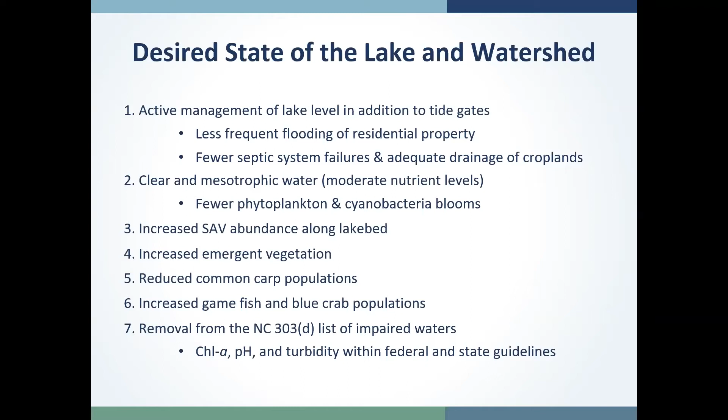Working towards increasing the SAV abundance along the lake bed and emergent vegetation, reducing common carp populations, as you'll hear from the technical working group later today, increasing game fish and blue crab populations, and again, the ultimate removal of the listing on the state's 303(d) list by getting the chlorophyll A, pH, and turbidity parameters within federal and state guidelines.

To attend to those desired actions, we identified a few priorities, including creating a formal body that provides management authority for active water management within the watershed in close coordination with the refuge, which would be excluded as a formal body since the Fish and Wildlife Service cannot cede management authority.

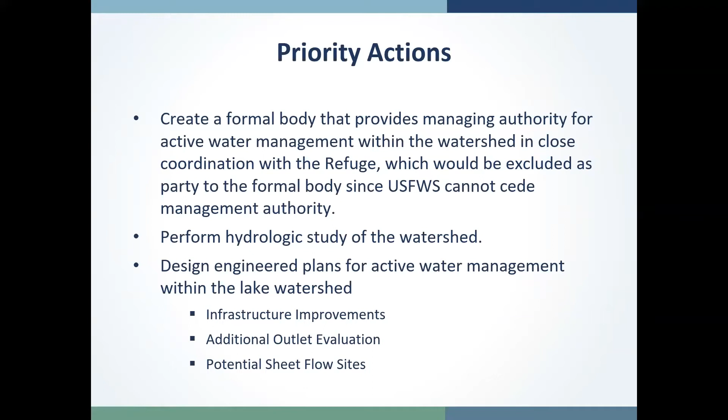We performed a hydrologic study of the watershed, which has been completed to date, and designed engineered plans for active water management within the lake watershed by evaluating where infrastructure improvements might be beneficial, additional outlets, and the use of potential sheet flow sites, which you'll hear more about tonight.

As we've gone from development of the watershed restoration plan to implementation, seeking funding to implement those priority management actions has been the priority, from 2019 to 2020. Funding was awarded from the Clean Water Management Trust Fund, the State's General Assembly, and the National Science Foundation. That funding was used to implement these priority management actions over the past 18 months.

We hired Geosyntec Consultants and Coastal Protection Engineering as the engineering firm to develop the hydrologic study and also develop some engineered designs that you'll see tonight.

This has been done in cooperation with a robust stakeholder team that includes representatives from the county, U.S. Fish and Wildlife Service, Wildlife Resource Commission, and many residents of the community within the watershed we're working in.

Additionally, a memorandum of understanding had been signed between Wildlife Resource Commission, Hyde County, and U.S. Fish and Wildlife Service to continue to see this effort through, even after the initial development of the watershed restoration plan.

For those who would like to review the plan, you can visit the project website at nccoast.org/Lake Mattamuskeet. The plan and additional resources from past meetings are available for your review, and you can also subscribe for updates about future meetings and submit comments after viewing the presentation tonight.

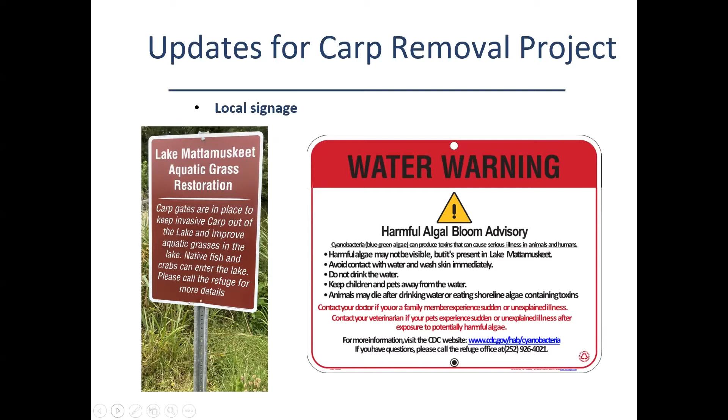The other sign that you'll likely see around the lake is the water warning sign that we installed a couple years ago. This is a public advisory letting people know we have harmful algal blooms that do produce toxins in the lake. Next slide, please.

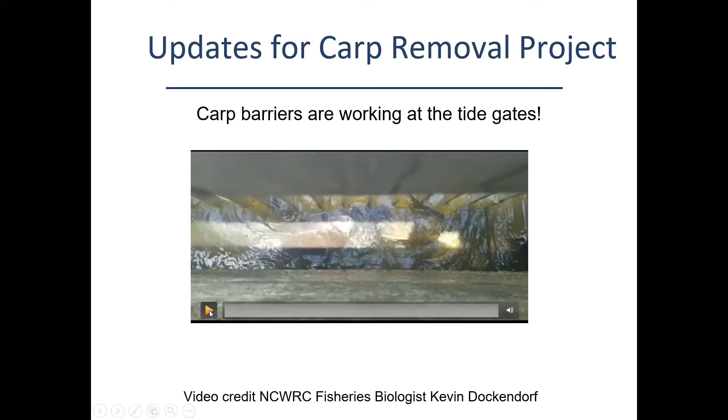The carp barriers are working at the tide gates, and this is some footage. This particular footage is from Wildlife Resource Commission fisheries biologist Kevin Dockendorf. Can you play this for us, Michael? This is beauty to our eyes. These are carp that cannot get through that 2-inch spacing on those carp barriers.

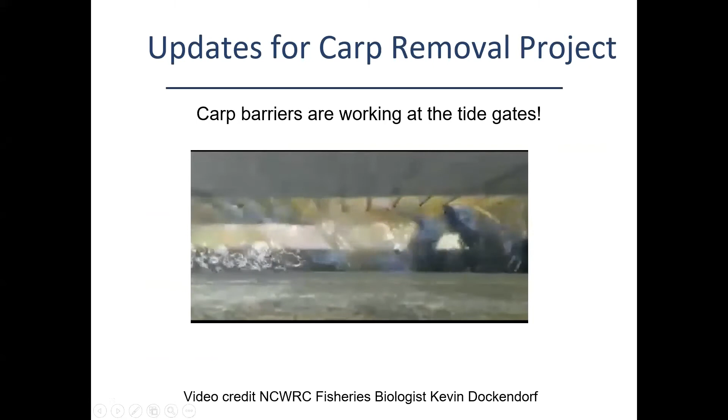Next slide, please. I have one more footage I need to share. This is from Wildlife Resource Commission Officer Robert Wayne. Michael, could you play this for us? This just shows all the carp in that bay at the tide gate. It cannot pass through those carp barriers. It's very, very exciting. Next slide, please.

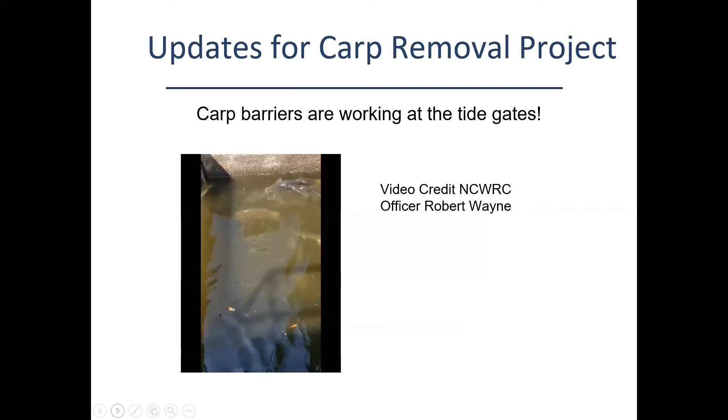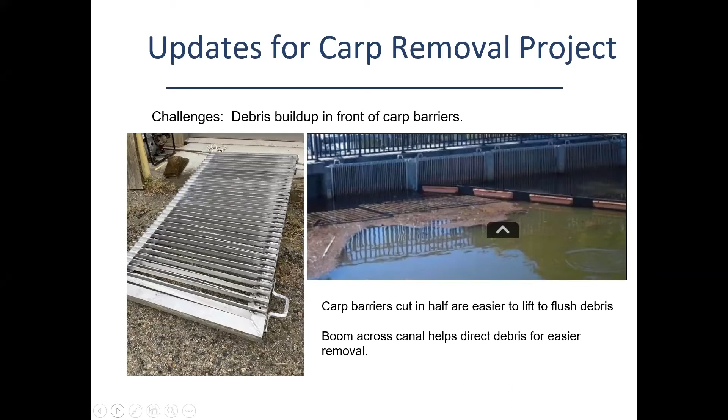This year, I'm really excited. We have 2 new East Carolina University capstone student projects. They started in August. These are the senior engineering students. For the first team, it's a Carp Deterrent team, and they are actually going to be working on a portable deterrent type device that we can place in that particular bay with that half-cut carp barrier to scatter the carp.

Dr. Raymond Smith from ECU sent us the idea, and then Katie Potaka, one of our fisheries biologists with Wildlife Resource Commission, she's actually had experience with this. We're really excited with some of the ideas that this particular team is already coming up with. In addition, this team is going to design some deterrent devices that we can place around the culverts that go through Highway 94. This will separate the east and the west basin and will be helpful when we do the maximum removal.

Some of these deterrent devices will also be placed in some of our secondary canals to prevent adult carp from going up into these side canals in search of additional spawning habitat. So this deterrent team's designs are going to be very important as we move forward.

Just as important is our biosecurity barrier team. This group of students is going to design the secondary barrier for the outfall canals. This barrier, the primary and the secondary, has to address what happens during storm surge, when we have water going over the tide gate that brings carp into the lake. So they're also going to look at some type of secondary barrier placed in the canal in case the primary barrier is damaged.

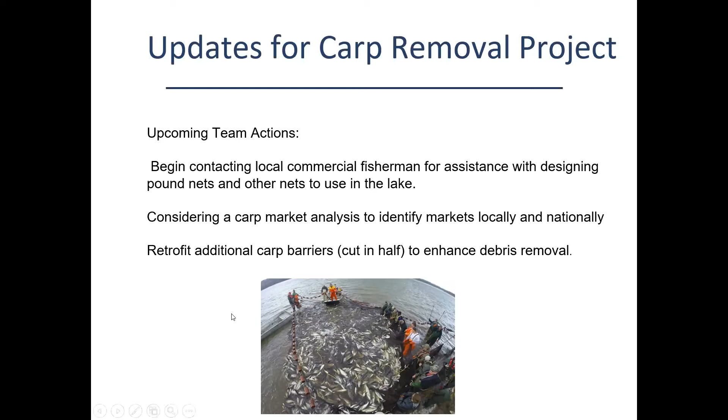If there's any questions, I might have a minute or two to address them. I want to sincerely thank all of our partners and collaborators, and I want to thank the members of the technical working group, because their moral support and their expertise, they're just an amazing group of professionals to work with. I think I can address a couple questions if there are any.

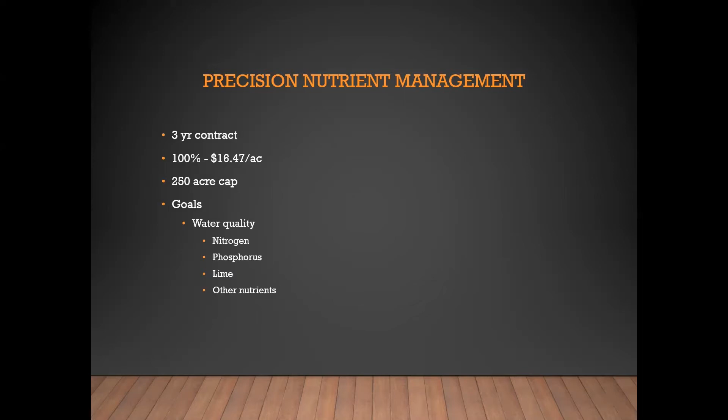The first practice, and as we go through these slides, the very first one is our district's top priority. So the first one we've got is precision nutrient management, and that entails a 3-year contract of GPS soil samples, 2.5 acres. It's considered an incentive, so it pays 100% at $16.47 an acre, and the district has set a 250 acre cap. With all these practices, the goals are pretty much going to be the same: it's all about water quality, and with water quality we're looking at saving nitrogen, phosphorus, lime, and other nutrients.

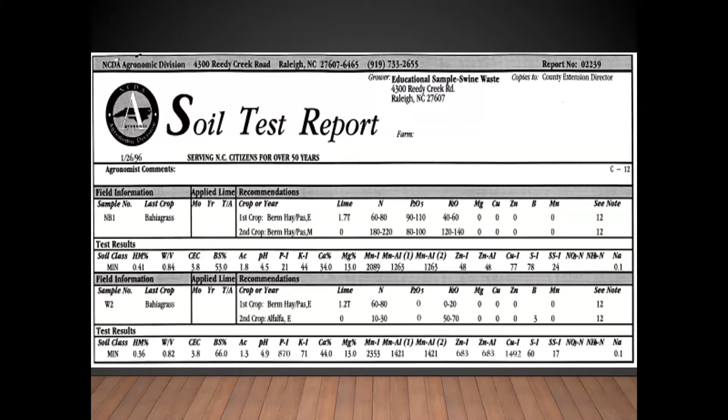The next one is water control structures. There's a 10-year operation and maintenance agreement, and it pays 75 or 90% based on your classification as a new farmer or a limited resource farmer. As far as pricing goes, it's dependent on the design and specs. The goals for this are water management as far as direction, tidal, and flow control, and again, you're trying to save nitrogen, phosphorus, and prevent salt water from intruding.

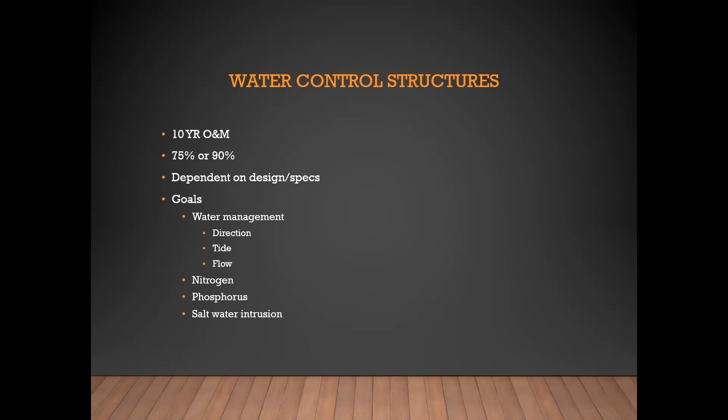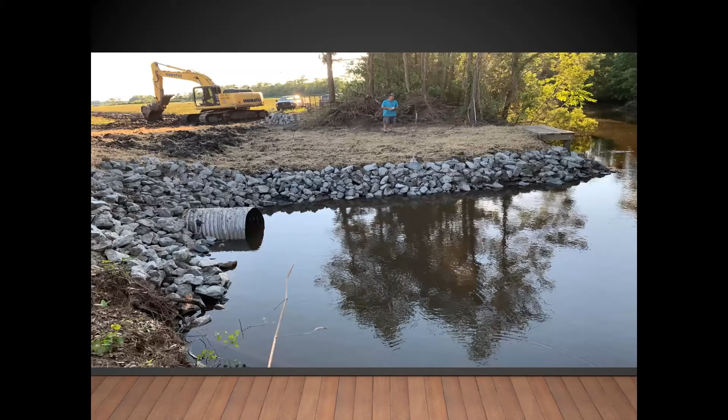This is a picture of a water control structure that was installed through one of our cost share programs. This is the inlet side, and there are boards there to allow you to control the amount of water that is held on that farm. This is the outlet side, and there isn't currently a tide gate on this end, but there is potential to put a tide gate here, and we will cost share on tide gates too.

The next practice is cover crop. You can either do an annual or a 3-year contract, and it's 75% at $38 an acre or 90% at $45 an acre, based on if you're a new or limited resource farmer. The district set a 150 acre cap. The goals with this practice are rain infiltration, soil health and organic matter by reducing wind and water erosion, and preventing nitrogen, phosphorus, and other nutrients from leaving the field. And that relates back to water quality.

Next practice is land smoothing. It's got a 5-year operation and maintenance agreement. Again, 75% at $205.88 an acre or 90% at $247.05 an acre. The district set a 40 acre cap on that, and the goals for that are water quality by reducing nutrient loss, reducing concentrated flow of water, and improved infiltration.

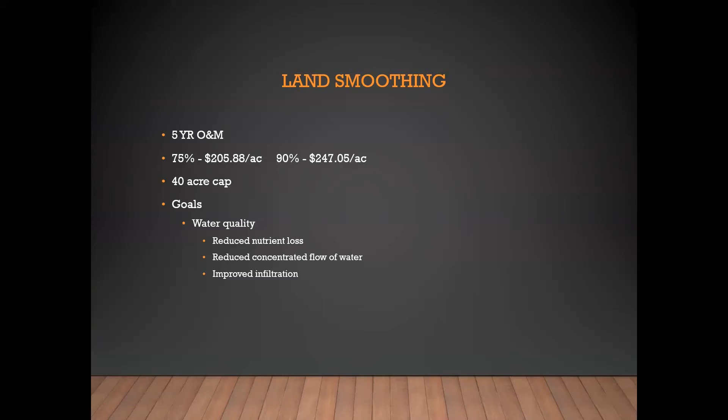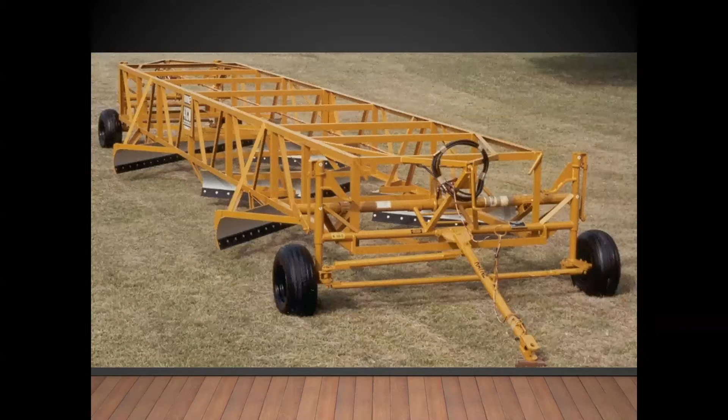The next one that we just added to our priority ranking is filter strips. It's got a 10-year operation and maintenance, 75% or 90%, and the price is all dependent on the design and specs that we get back. Got a 2-acre cap using only impaired and impacted funds set by the district. Impaired and impacted funds is basically the 303(d) list, so Lake Mattamuskeet's up there on it. The reason we decided to do impaired and impacted is because that's going to have the greatest benefits there. The goals for that are water quality through reducing sediment deposits, preventing nitrogen, phosphorus, and other nutrients from leaving the field.

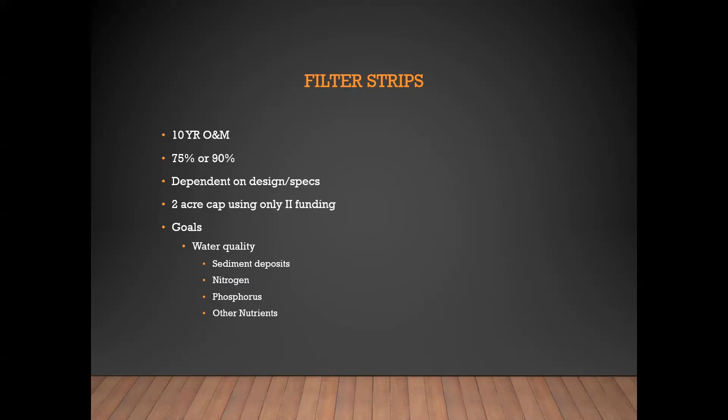If anybody's got any questions.

How wide are the filter strips? It's all based on the design we get back. I haven't done any filter strip design, so it'd be based off the NRCS.

And then you said the cost share payment was 75 to 90. What is that cost sharing? The 75 to 90%, that's based off of 75% is your average person. 90% is based off if you're considered a new farmer, which means you have less than 10 years farming experience, or you're a limited resource farmer, and there are a couple of different criteria for that. I guess my question, I should have worded it more clearly. What is that cost sharing for? What are you sharing the cost of? Is it a rental rate? Implementing the practice. So whatever, so your vegetation that's involved, any grading, anything like that.

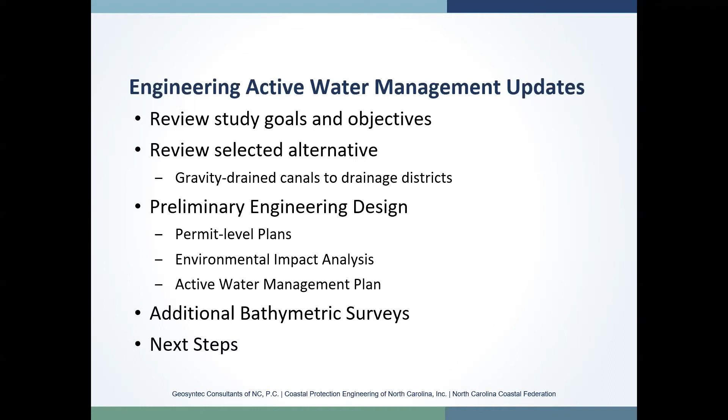We'll also look at future environmental impact analysis and the components of the active water management plan that will all be delivered as part of the scope. We'll discuss some considerations for additional bathymetric surveys at the existing outlet canals, and our next steps and schedule for the remainder of the project.

The study objectives are detailed here. The first component was developing a watershed scale H&H model and calibrating it to the water levels observed during Hurricanes Matthew and Joaquin, then using that model to evaluate how the lake responds to various design storm scenarios, both in existing conditions and with future sea level rise projections. That's been presented previously at these public meetings.

The next step was looking at various engineered options that could be used to actively manage lake water levels. We used a screening criteria for the 10-year design storm and looked at various options, including sheet flow sites, standalone pumping operations, dredging or removing sediment from the existing outlet canals to their design depth, as well as the selected alternative, which was gravity drain canals that would drain north towards existing drainage districts.

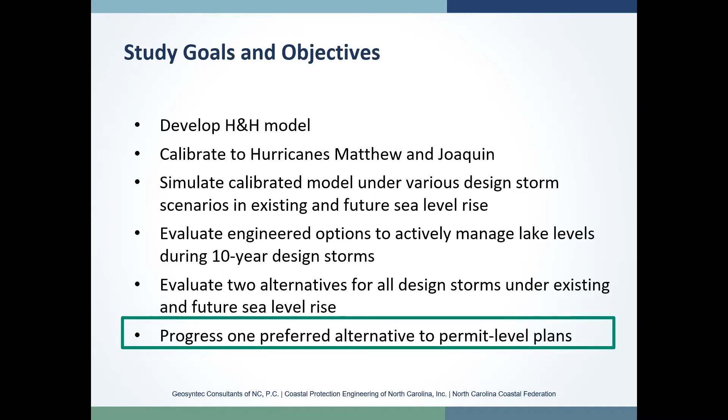We looked at this 10-year design storm screening and, based on that, selected two alternatives that were progressed to evaluate for the entire suite of design storms. That's been done since the April public meeting. Then, based on that, with stakeholder input and Hyde County Board of Commissioner input, we selected one preferred alternative to develop permit-level plans that could be used to secure additional funding for construction of this project, as well as begin the permitting conversation.

The selected alternative involves 3 gravity drain canals that would discharge to the existing drainage districts at Fairfield District Number 7 and Mattamuskeet Association. I do apologize, there's a typo I failed to correct. We're looking at Jarvis Canal, Burus Canal, and Swindells Canal, which is adjacent to the Oyster Nest campground.

The idea is that there would be an adjustable water control structure, like a weir gate, that can be raised and lowered to control the flow of water between the lake watershed and the lake boundary to these drainage districts, which typically have a lower operating elevation within their drainage network. We can use the gravity-drained head of the lake to draw down lake levels, and to manage the additional volume of water coming from the lake into these drainage districts, there would be upgraded pump capacity to handle that volume. It would be a cooperative effort between the drainage districts and what could become a service district that would help fund this operation.

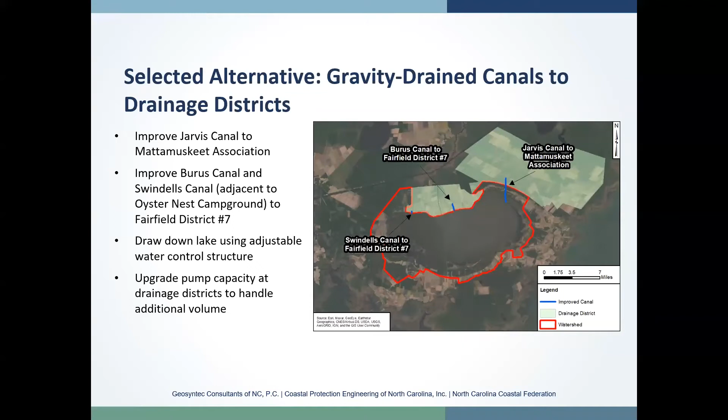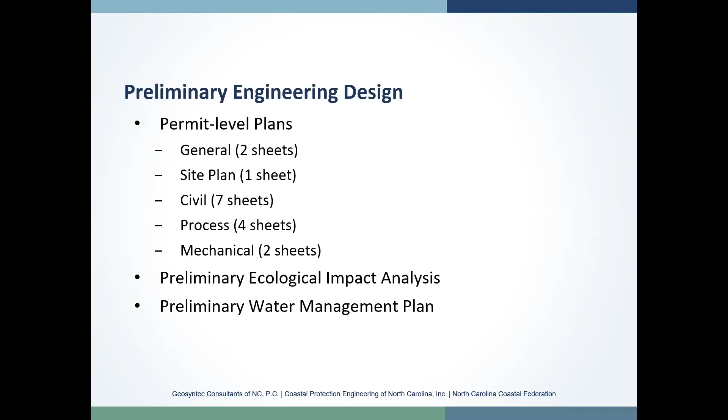Based on that concept design, we've progressed to a preliminary engineering design that consists of civil design, process design, and mechanical design. We're also developing a preliminary ecological impact analysis and a preliminary water management plan that would provide operational considerations for making this concept work for both the lake watershed and the drainage districts.

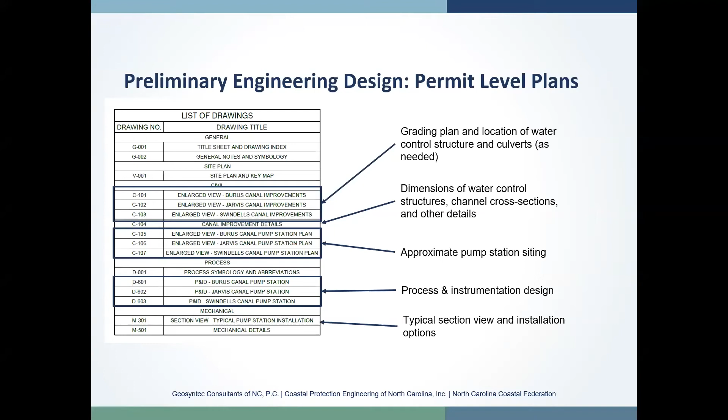We'll go through some of the concepts on that plan. We've developed a grading plan and locations for water control structures and culverts as needed, specified preliminary channel cross sections, the dimensions of the water control structures, and how those might operate. We've preliminarily selected pump station siting for each of the 3 canal improvements, done a process and instrumentation design for more detailed mechanical and electrical design, along with installation options and a typical section view of the pump. This is the overall site plan.

The first, we'll kind of go from left to right, but Swindells Canal here, I don't know if you can see my, okay. Whoop.

So for Swindells Canal, it would be approximately 800 linear feet of improvements to widen that canal and make sure that it can convey the design flow rate.

And then there would be a water control structure along Piney Woods Road. That again would be an adjustable weir structure that could be raised and lowered based on specific management needs.

Going left to right, Burus Canal would have approximately 3,500 linear feet of canal improvements with a water control structure at North Lake Road. And then Jarvis Canal would have about 13,000 linear feet, with the water control structure at North Lake Road as well.

You can also see the pump stations where they're approximately proposed here. Each of those pump stations would have a similar design with 48-inch pumps, and that could be operated all at one time or two at a time, depending on the pumping capacity that was needed.

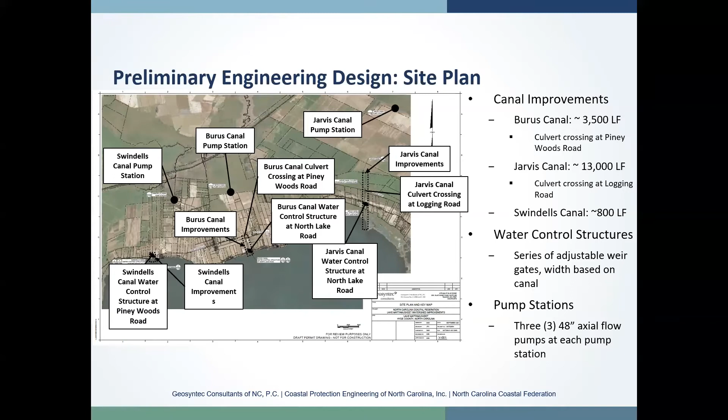Here you can see some of the preliminary grading plan. The bottom width of the canals would vary between 30 to 50 feet based on the location, and would be graded to have a slope that would drain away from the lake.

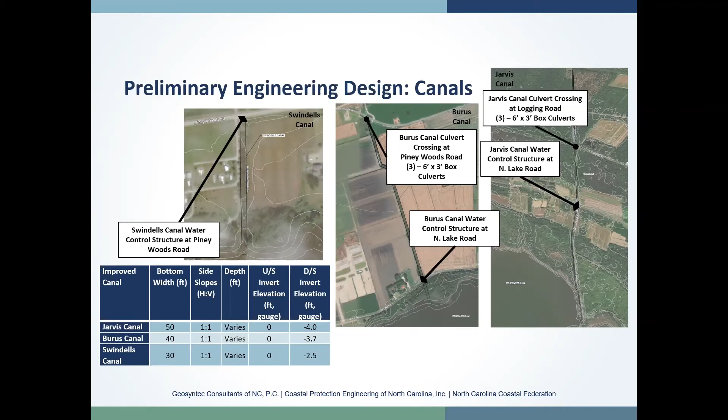As needed, there would be potential for upgrades of the culverts to convey the additional flow coming from the lake. I do believe that Burus Canal, where I've shown that crossing at Piney Woods Road, there's a bridge there, so the box culvert upgrade may not be needed, but we'd look at that for Jarvis Canal as well.

As for the water control structures, we are looking at an adjustable weir gate, so the conveyance capacity of the receiving canal is generally in excess of what would be able to be pumped by the additional pumping infrastructure proposed. That could be up to 180,000 gallons per minute if all three pumps are operating at one time.

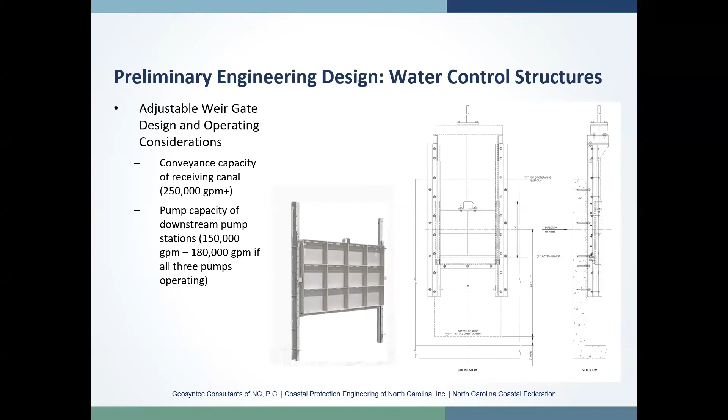Some of the operating considerations of how these weir structures would work is that you would need to set the weir elevations such that the flow discharged to the downstream drainage districts would not exceed that pump capacity. We've put some preliminary bounds as part of the active water management plan on what the maximum head could be to make sure there's not a flow rate in excess of that volume. You can see here for each canal, the weir width varies.

Based on the width of the canal as well as what makes sense for the canal, we've looked at a couple starting water levels. To explain this further, the weir gates would generally be fully closed such that there is not flow between the watershed boundary and the drainage districts until a drainage event occurred.

This could be because there's a storm event coming and we want to lower the lake water level, or the lake water levels not being able to be drained from the existing outlet canals because the sound level is high and that's becoming a problem. So then there would be a time where the weir gates would be lowered such that flow could occur across that boundary.

If we're starting at about a 2.5 foot gauge height, you can see that basically the weirs could be lowered all the way down to 0 foot gauge, and we would not have an issue exceeding the capacity of the downstream pumps.

However, because the maximum weir head is equivalent to that 2.5 foot head, if we're starting at a higher water level, which would be the case if there was a very large storm event, approximately 50-year storm event peak was modeled to be about 3.5 foot gauge.

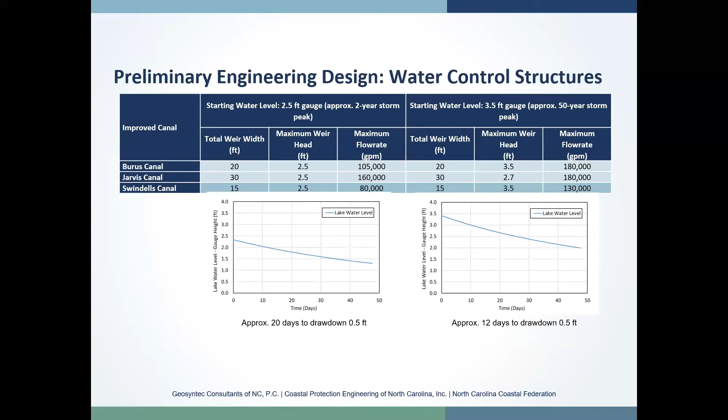So we've all looked at some preliminary siting for pump stations. What has been proposed right now can be either powered by diesel generators or 3-phase power with power line extensions.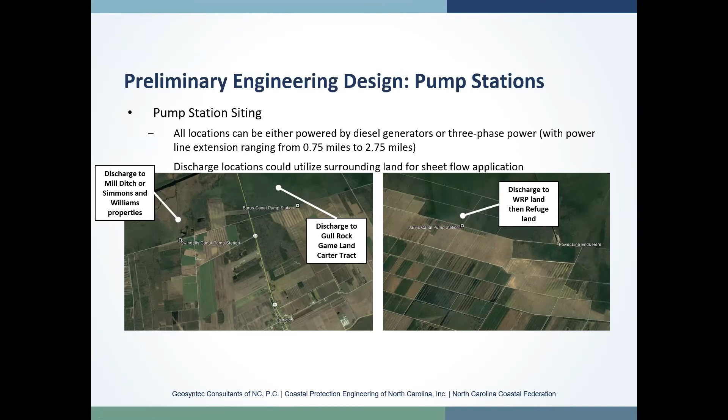Just to get an idea of how this pump station operation would work, we have the piping and instrumentation design here. So there would be alarms and level transmitters that would basically be able to tell the pump when to turn on and off.

We're looking at 48-inch pumps right now, again, likely maximum capacity of around 60,000 gallons per minute, although that'll be dependent specifically on the final total dynamic head and other operating conditions. There will be controls on the pump itself to allow you to manually turn them on and off as needed, but they can also be automated.

And then there will be additional controls downstream at the discharge to make sure that there's no backflow into the structure. So that kind of wraps up the status of the design currently. We do have a little bit more detail in the plans themselves, and if anyone's interested, I think they're available, and we have a couple copies printed out here as well for those who are in the audience.

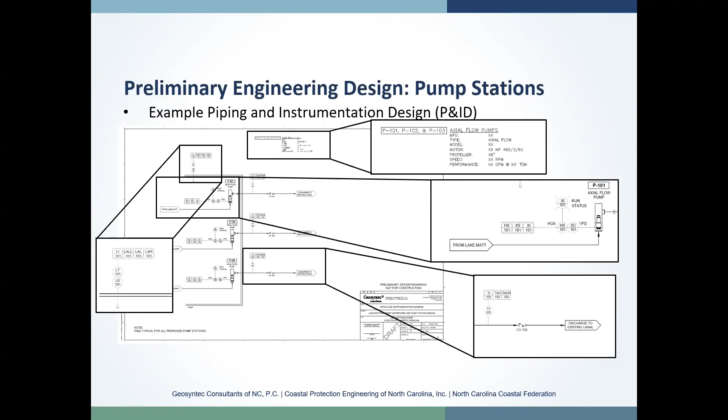So we're also working on providing an ecological impact analysis, which would be a preliminary analysis to look at ecological impacts of the project. There's various components of that. We'll of course discuss the need for the project and how the alternative was selected based on the screening rationale during the development of the model.

We'll discuss potential permits that are needed, but most importantly, the changes that might occur to the environmental features. And so this will be based on sheet flow application and moving water to different places than they've been in the past 10, 15, 20 years.

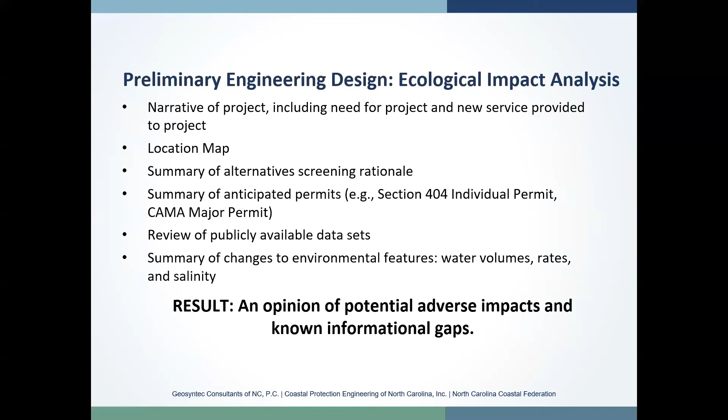And so the result of that will be an opinion of what these potential adverse impacts could be, as well as what needs more research. We've done our initial data review at this point, and we're in that evaluation of what the ecological impacts would be. That's expected to be completed within a couple weeks.

For the active water management plan, again, there will include a narrative of the conceptual design, which will discuss the components of the design that we briefly went over, as well as a description of construction methods, and then providing an opinion of probable cost based on AACE standards Class 5 capital construction costs, as well as a potential annual operational budget, and how much volume of water that operational budget might be able to manage.

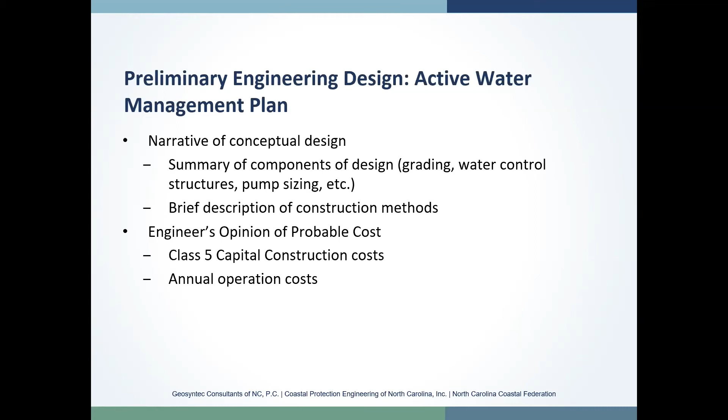So looking at that here, as part of the H&H report that was prepared back in June, we developed some preliminary cost estimates, and we've updated those a bit based on the more detailed design. For implementation of all three projects, we're looking at about $6 to $11 million. I know that's a wide range, but there's still a lot of design details that need to be narrowed down to get that cost more precise.

And then looking at annual operational costs, we based the budget off of various contributions of a per-acre fee that was assessed on the watershed, and estimated how many hours of pumping at various flow rates you might be able to achieve based on that operating budget.

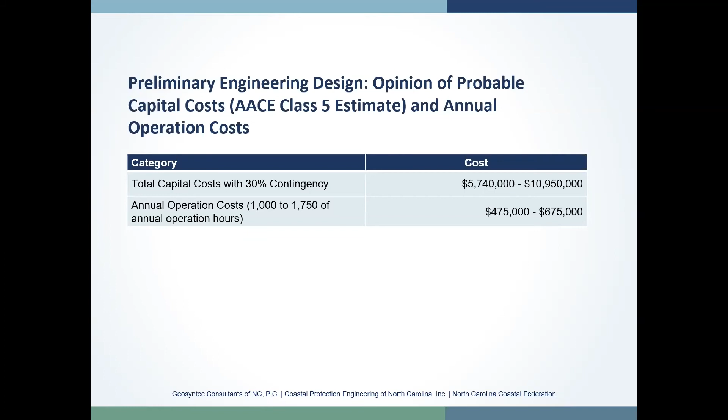So to give a little bit more detail here, I'll go through each of these columns and explain what they mean. The potential annual operating budget is based on a dollar per acre charge that right now consists of the lake watershed that is not within the refuge. There's about 18,000 acres. At $25 per acre, you have about a $475,000 budget; up to $35 per acre, about a $675,000 budget, based on that 18,000 acres that could potentially contribute to this.

And so we looked at there are some fixed costs associated with operation and maintenance of the pumps, and this is also based on the use of a diesel generator and diesel fuel. So there are fixed operational costs, O&M costs for that as well.

But we were able to estimate, based on an average number of pumps operating and that average pump capacity across all three pump stations, how many hours might be achieved, and then also how that translates to annual drawdown volume. You'll see a difference in that because of some of those fixed costs and the additional fuel consumption costs.

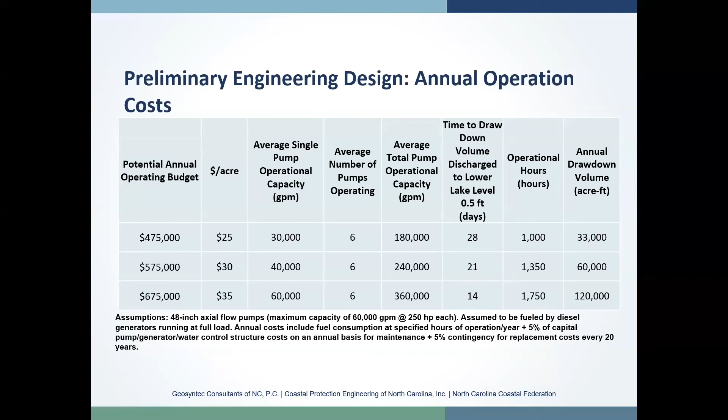Unfortunately, my animation didn't make it to this slide, but one other consideration we've heard from stakeholders and are continuing to evaluate is collecting additional topographic and bathymetric surveys to improve quantities of removal that would be needed to restore the outlet canals to their design depth, or original design dimensions.

And so we have prepared a proposal to do that additional work to help improve quantities and also update the model to be able to reflect better, more actual conditions compared to the LiDAR information that's in there right now.

We know that this is something the stakeholder group and the public want to continue looking at. It is something that the funding is based on state budget funding that's not currently approved yet. So this is something we'd be looking at doing once that state budget is approved, and probably more in the winter time frame when there's less vegetation to help improve the collection of the data.

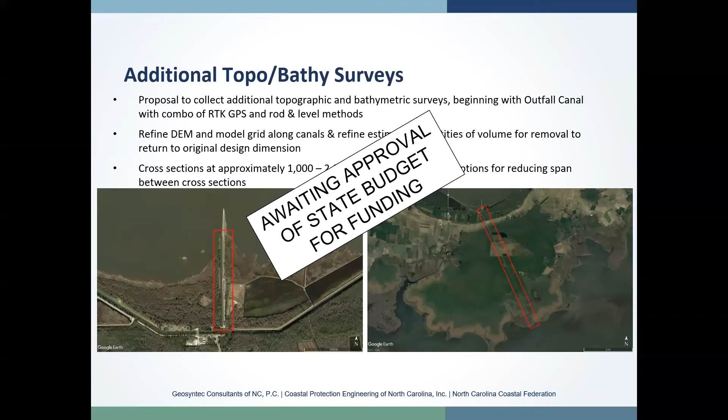So our next steps for the project are to finalize the plans based on feedback from stakeholder groups, and also finalize the ecological impact analysis and design narrative.

As I said, we've looked at potentially collecting additional bathymetric data, and we'd like to move forward with that pending funding. Then the key component will be finalization of the service district boundary, which could potentially include that additional bathymetric data. One thing we've discussed is rerunning the model with the latest bathymetric data, but also the latest design, since we've had some updates from what was originally modeled in that 10-year screening step.

And that could be used to better quantify the benefit that would be observed for landowners, both close to the lake boundary as well as those within the watershed further away, so that there's a basis for developing the service district boundary, and potentially also looking at a tiered fee structure for those that benefit from this project specifically.

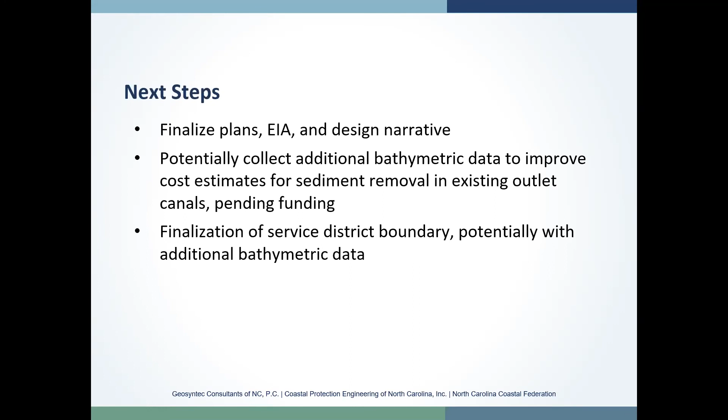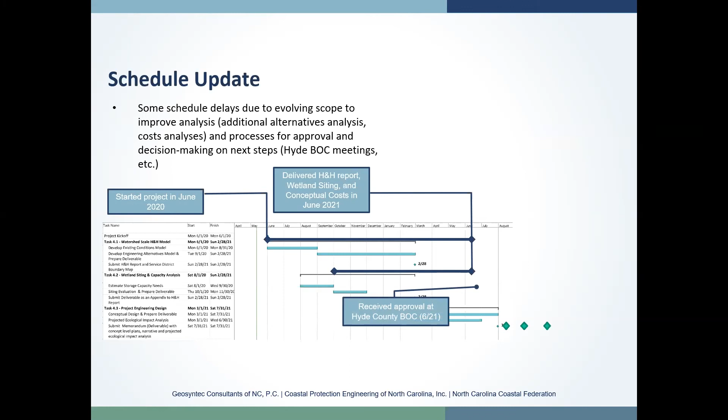And then we received approval at the Hyde County Board of Commissioners meeting to move forward with the preliminary engineering design of the gravity drain canals concept. And so this meeting here is the...

Today, and we submitted the drafted plans September 14th. We're looking at submitting the draft of the ecological impact analysis in early to mid-October, and then the narrative final permit level plans and service district boundary in late October. That is pending the additional topographic and bathymetric collection of data as well.

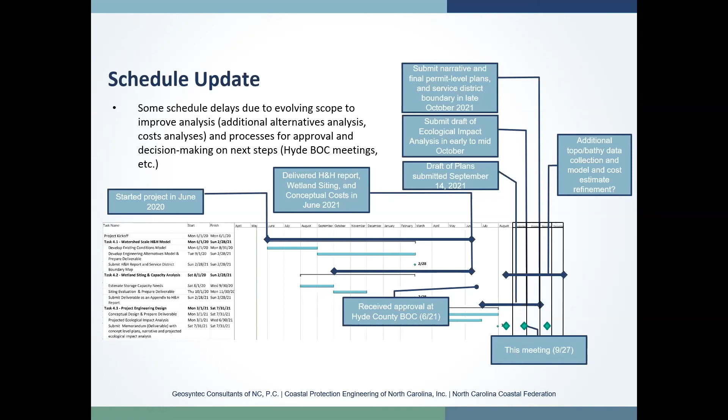But certainly we want to continue to get feedback from the community and make sure what is being proposed, folks understand that, and that we're getting feedback.

So with that, I will take any questions. I don't know how to check to see if any came in. Maybe chat or Q&A, I'm not seeing any right now. Nothing from the audience online. Anybody here tonight? I've got a question and then possibly a comment.

Alyssa, back to your operating cost analysis. Did I understand that right to say that the projections you had there per acre were currently based upon 18,000 acres? They were. Okay, and so the reason for that was because it's the general understanding right now that the refuge can't participate in the funding of that operational cost.

Right. Okay, so I think you're building this particular active water management project based upon servicing the entire service district. So without being harsh with my words, I think it's a bit disingenuous to only spread that operating cost over 18,000 acres. And I don't want to get into...

Whether the refuge can pay or not, my only point is that acreage has to pay, and we have to find a way that it can be a contributor to the total of the operating cost.